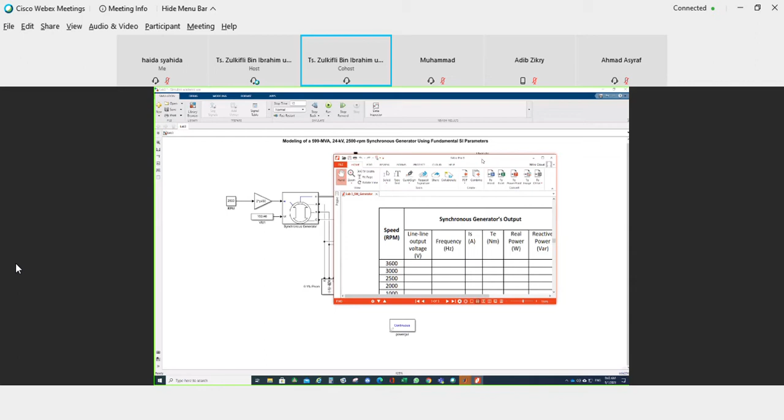This is for lab 3. For the first task in the lab sheet, you need to find the value of excitation voltage when the load is 3 kilowatts and the Q,

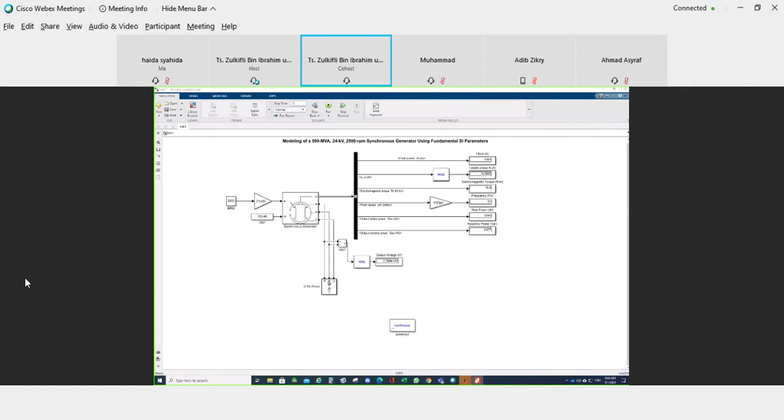the reactive power is 2 kilowatts. And then you have to find the correct value of VFD, the field voltage. So your parameter of interest is when you change the VFD.

So your output voltage is your parameter of interest. That means you change this VFD and you look into the output voltage. This value has to equal 24 kilovolts, right? So that's the first condition.

So you change the value of the load, and then you set the speed to 2500 RPM and 50 hertz. Of course you will get 50 hertz, and then you change the value of VFD. So try to get the output voltage, V line to line, equals to 24 kV. It's not necessary to be at the exact value of 24 kV.

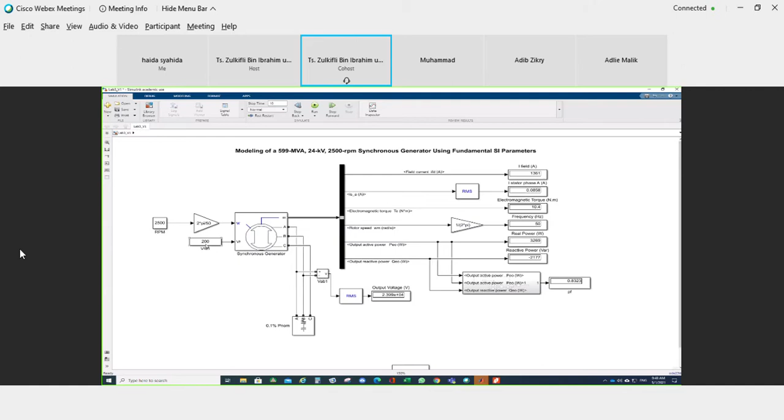As you can see here, it's not the rate of change, it's the change in power factor. So this is the PF, the power factor, is small. Let's say this is 2000, then 200, so let's say you change to 550, you'll see the change is almost negligible, it's very small.

So maybe the load is too small. I think for this second part, all you need to do is keep the machine running at 2500, get 50 hertz, okay, and then now you change your load

So you try to do, change this value and try to get the power factor equal to 0.75. So you have to change it. Basically you take, change here, make it smaller, 70, try to make it smaller.

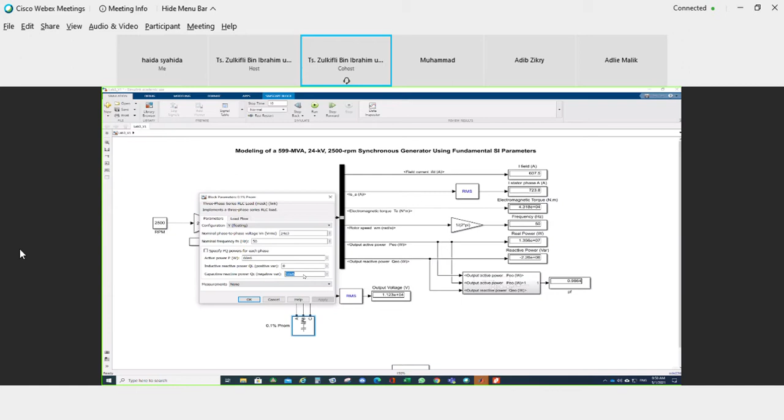Okay, so you try to change this value until you get the power factor equal to 0.75, and then when you get this 0.75, you get this. Let's say here I get my target as 0.70, for example, so the output voltage has to change.

So by means, in any load, I need to have the output voltage at a constant value of 24 kilovolts. So the parameter that I can play with is the VFD. So this one again, let's say I put 2000.

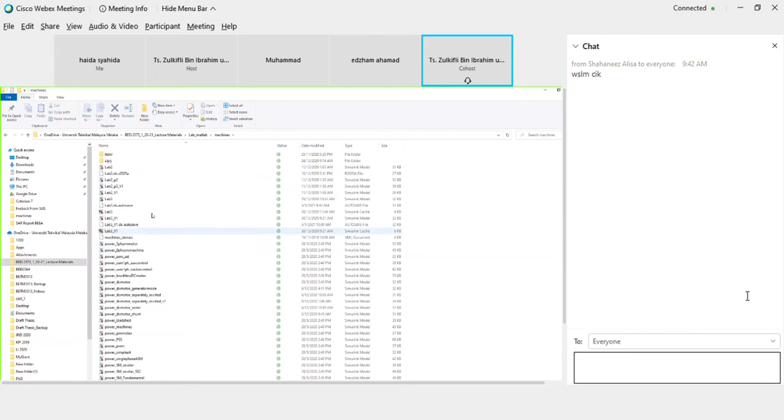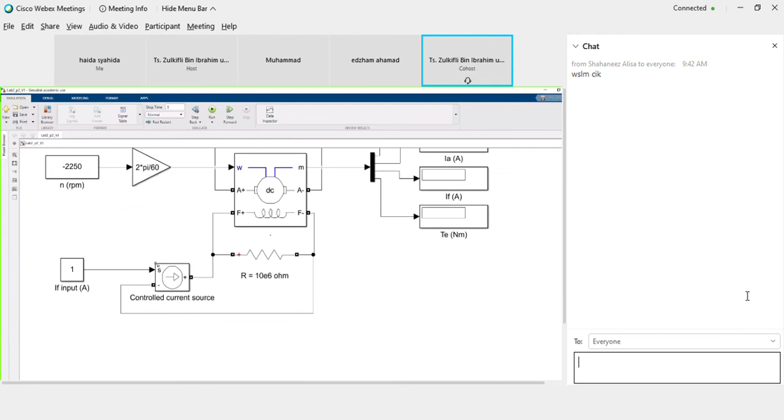Yes, this one - you see, you need to have very high... there's a current source like this, so you need to have very high value here.

If I remove this and run it, same result. So for the controlled current source, it says add a high value resistance in parallel with one of the two blocks.

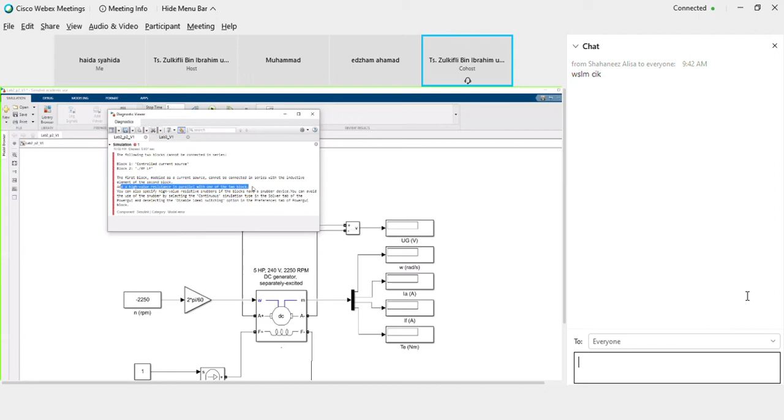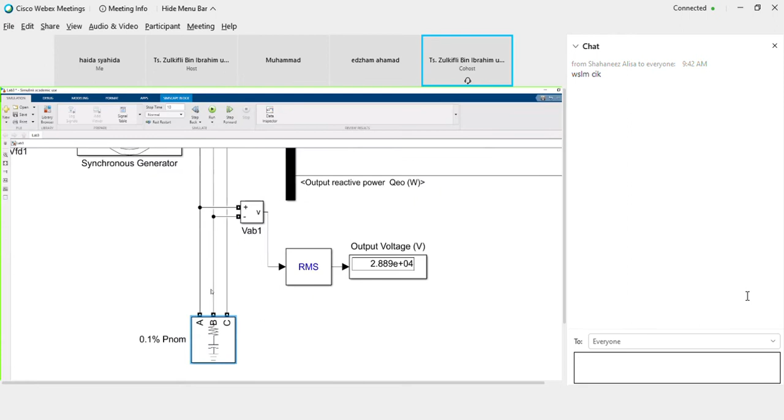You see what needs to be done? So what do you need to do? Between these two, this block and this block, you have to put parallel resistance, high resistance. So between here to here, here to here - you need two, among these three.

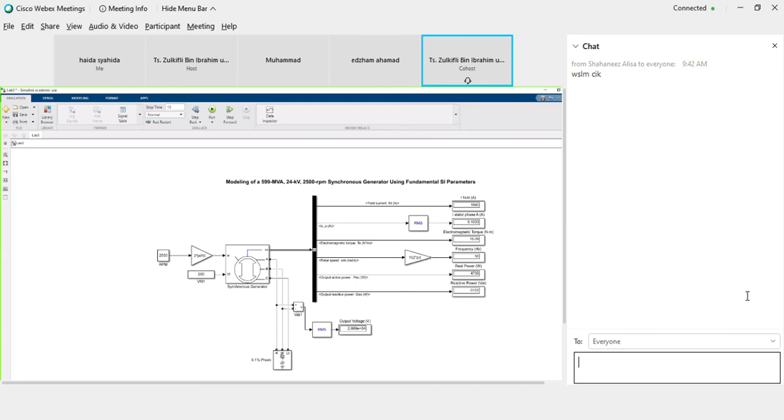Branch - so you go to your lab 3 earlier, RLC branch, okay, double click, go to resistor only.

Okay, so the value that is very high, you can put - it should be very high, 10E6, 10 mega ohm. So one connects here, one connects here, you need to have another one, and one connects here, and one connects here.

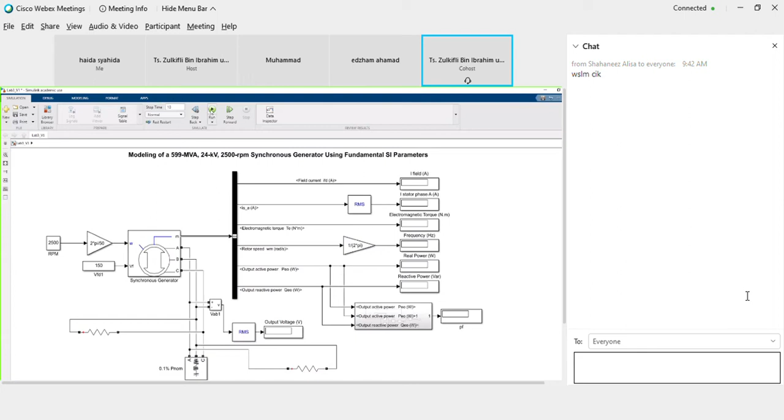So this you can try, I think it's okay. Okay, so let's run it. It's running. But I think this value is already quite small. Oh, it's almost one - you need to put a very high value.

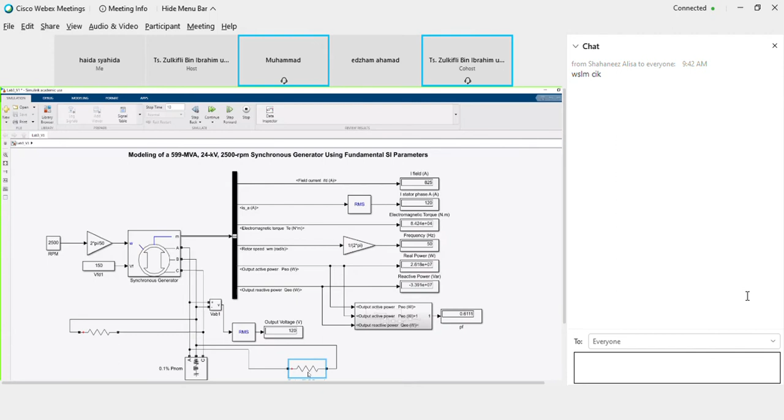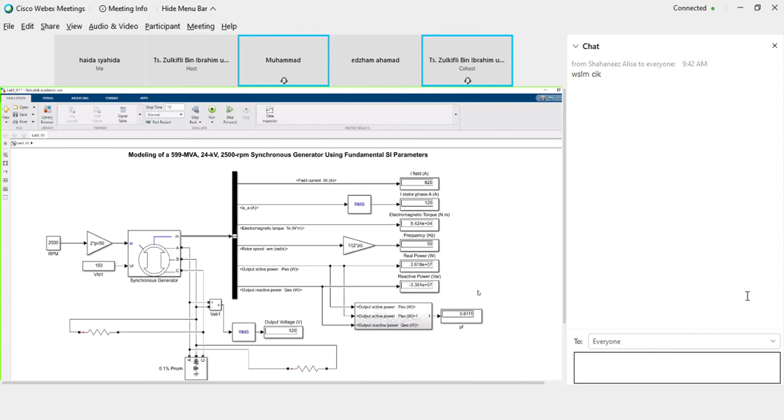So you need to make it yourself. How do I make it? It's in the book, in the notes. I think in your electrical technology subject you must have learned how to find the power factor - the power factor, you have real power, you have reactive power, so you should be able to find the power factor.

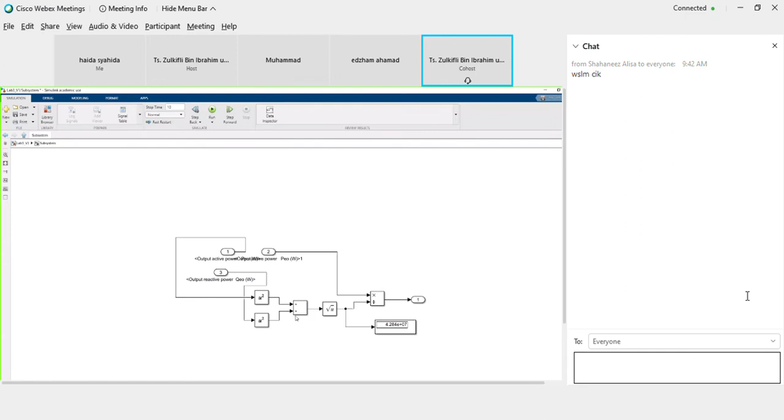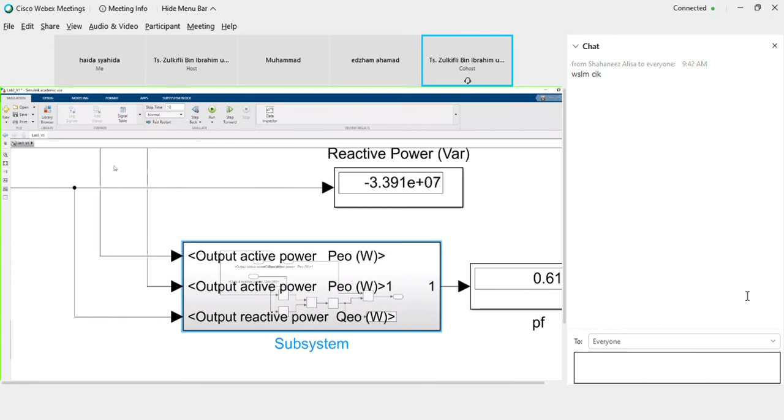I won't tell you everything, figure it out yourself. So maybe you can explore how to write an equation into Simulink - meaning x equals to, for example y equals to, you can try like mc squared plus something. So how to...

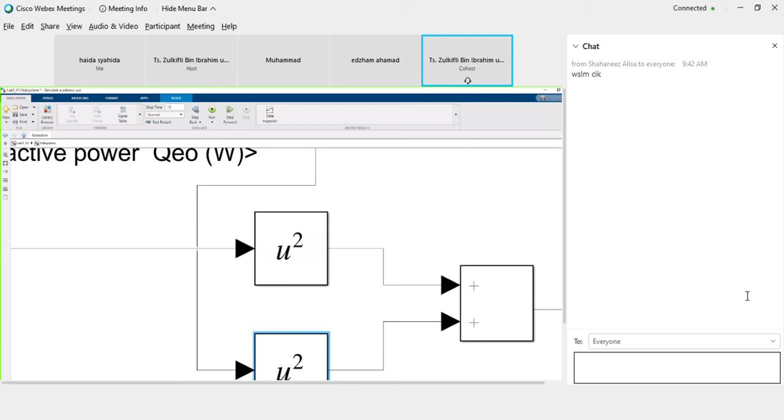You get apparent power, S, right? Surely you haven't forgotten. Correct? Don't remember? Then correct, so you get S. S equals to P square plus Q square, square root, right? So this is the value of your S now.

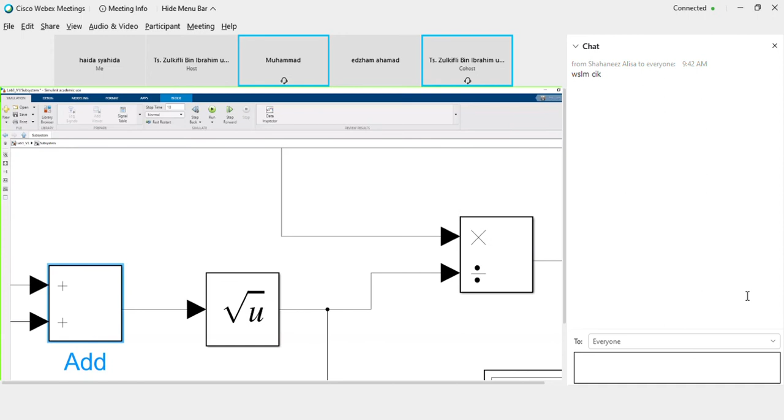So this is the value of your S. The power factor equals to what? Cos theta equals to P, the real power, divided by the apparent power. So here I have the value of real power, so you divide it by this value, apparent power - now you get the power factor.

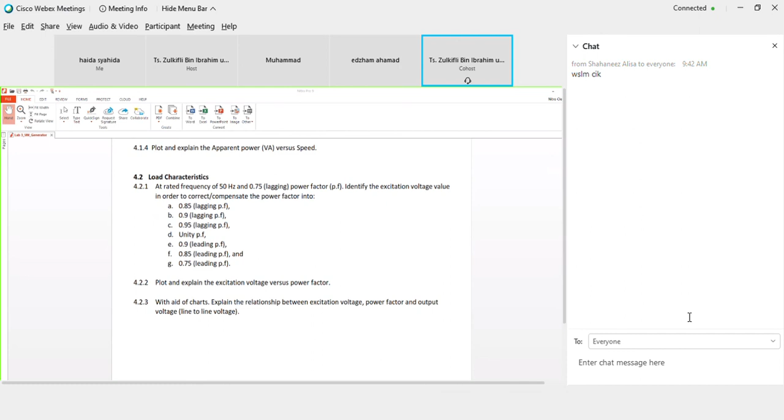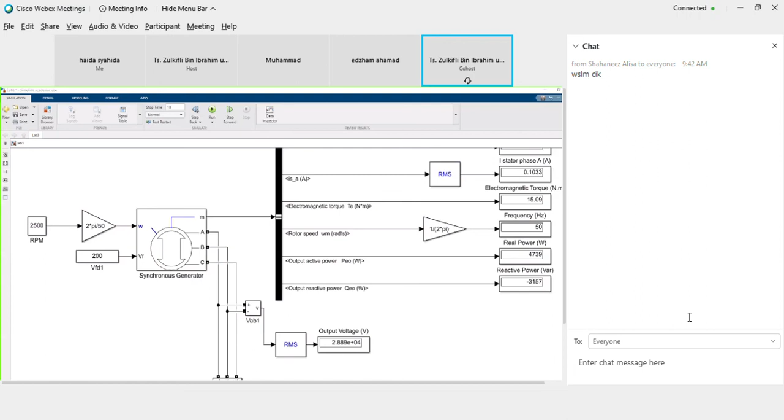Kita expect that field kita ni berubah. Maksudnya kita nak dapatkan the same voltage tu, field excitation for constant terminal voltage. This is the excitation voltage, fixed at this value. So maksudnya kita maintain this output voltage at 28.89 kilovolt dan kita increase, kita change the value of the load, so you get the power factor yang kita perlukan. Lepas tu suppose we need to change this supaya dapatkan value yang kita nak, tapi dia tak berlaku dekat sini.

Secara generalnya lah, kalau dekat mana-mana mungkin dekat lab akan berlaku lah kot. So bila kita increase load to this load, maksudnya sama ada kita ada power factor lag 0.8 ataupun 0.9. Intention saya supaya awak boleh plot graph macam ni, ikut perubahan pada load, tapi tak berlaku. Jadi kita buat macam tu je lah, macam tadi buat.

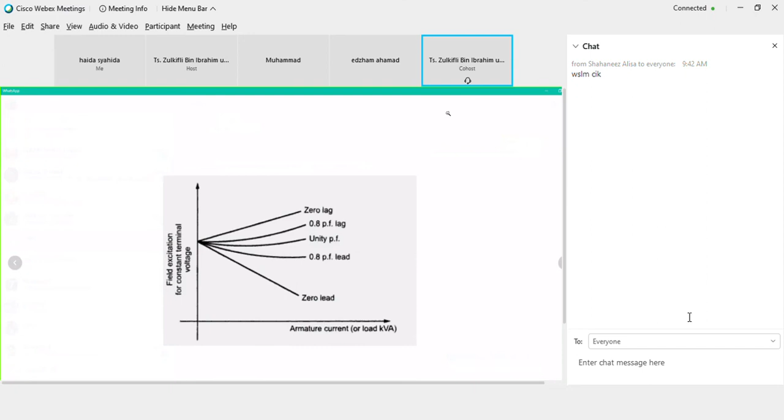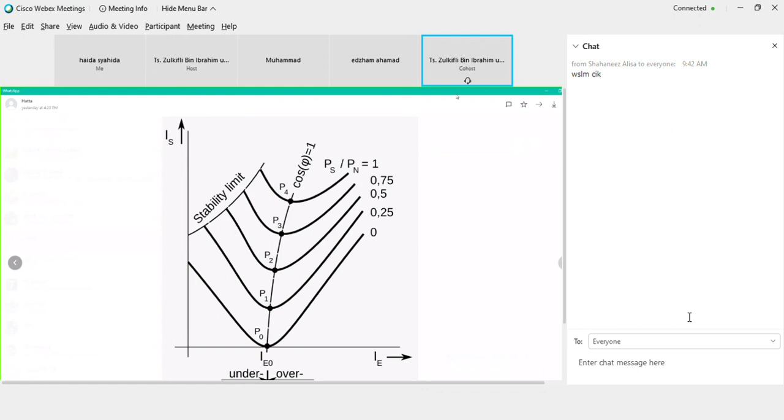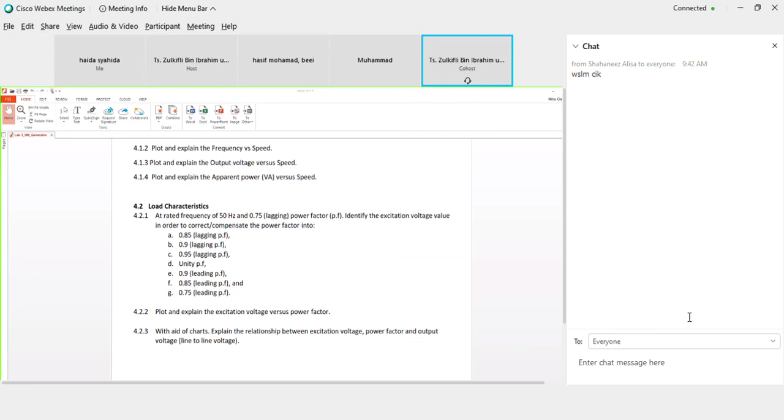Ambil balik lah, boleh saya ambil balik your lab 3. Saya berharap akan ada perubahan, tapi tak ada perubahan, so tak dapat nak tengok dia punya kesan bila kita change power factor. Mungkin saya perlu tukar delta sikit kot. So macam mana? Okay lah, okay kot.

Cik, saya nak minta izin lah. Boleh tak kalau submission tu dilewatkan sikit?

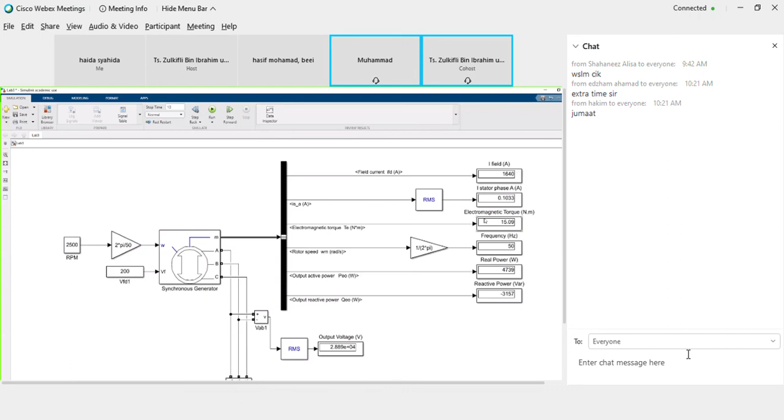Sebab saya pun banyak nak kena belajar pasal MATLAB ni cik, sebab saya bukan buat dengan kelas saya je. Saya buat dengan kelas BA yang cik ajar pun, diorang pun gatal kepala. Jadi saya harap cik boleh consider untuk kita orang siapkan lab ni dengan jayanya. Bila nak?

Kawan-kawan ni khabar dekat chat Jumaat katanya. Jumaat cik, Jumaat ni? Jumaat ni by 5 lah. Okay, alright. Cik, masih banyak cik, okay. Saya memang sangat-sangat menghargai cik.

Saya minta maaf banyak cik sebab saya MATLAB ni, saya rasa kawan-kawan saya pun sama. Kita orang ni banyak benda lah kena belajar cik dekat MATLAB ni, nak kena try and error. Ya, memang software ni try and error.

Tapi kalau once you have this experience pakai Simulink ni, nanti untuk your PSM you can suggest lah menggunakan Simulink untuk design something yang menarik, so control ni, ataupun untuk robotics, untuk macam BE, awak BAI kan, boleh buat untuk buat stability punya study ke, macam awak tahun 3 sekarang power system dah kan? Dah power system, tengah power system.